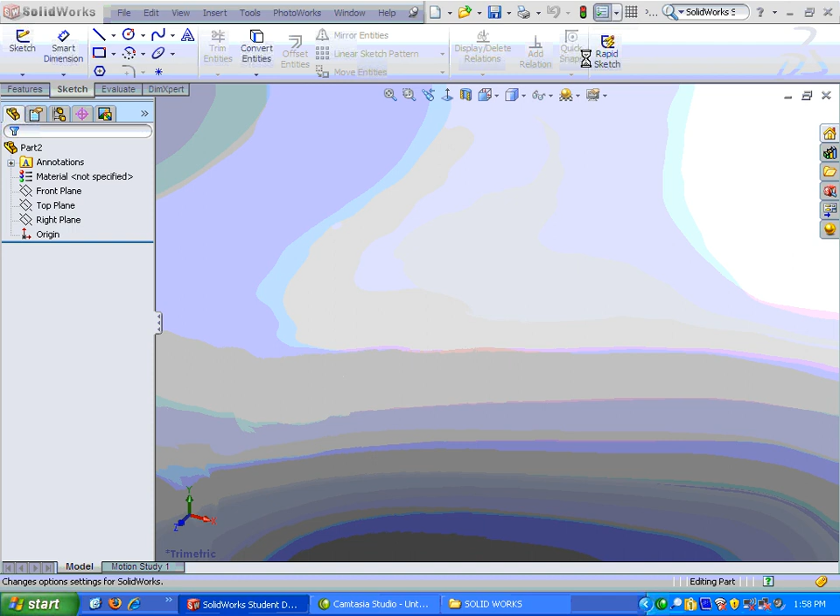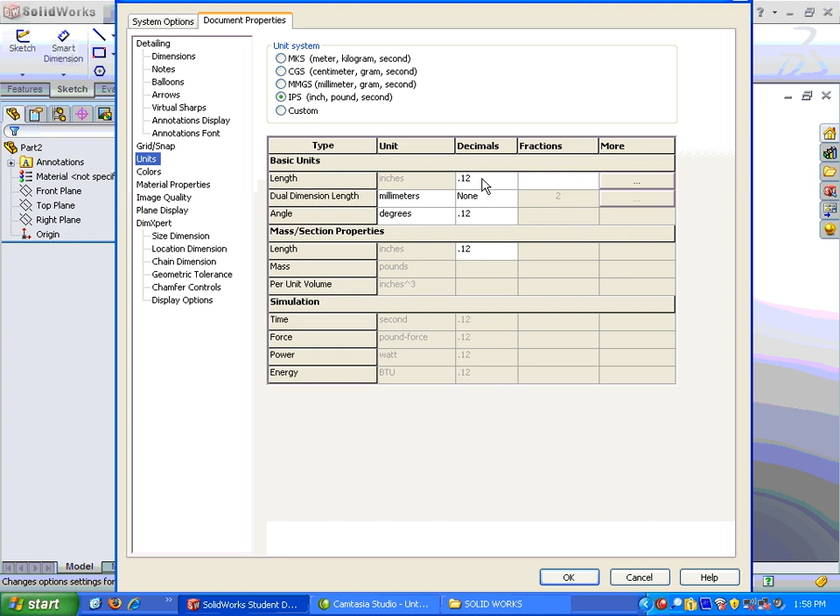Under document properties, I want to make sure my dimensioning standard is ANSI. I'm going to go down to snap and grid and display the grid on my sketches, so I'll click that button in. I'm also going to go to units and make sure it's in inch pound second, and change my decimal precision from 2 to 3, then click OK.

Now we're ready to start. I'm going to go over to my design tree where I have my different planes, and we're going to start on the right plane. As soon as I click that, I get a dialog box with my sketch button, so I'll click sketch, and that turns my right plane so it is normal to me. My sketch is there, so I know it's active.

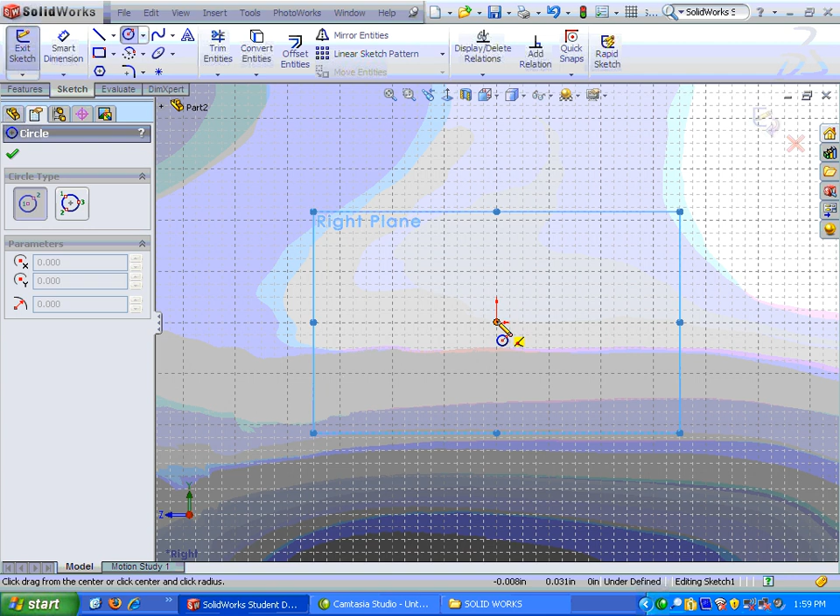I could start sketching from my tools up here, but if I right click, my tools are also available there. I'm going to start with a circle, put it on the origin point, click, and it doesn't really matter how big it is, so I'll just click it into place.

What I'm going to do now is dimension that circle. I'll right click again and choose the Smart Dimension button, then click on the circle.

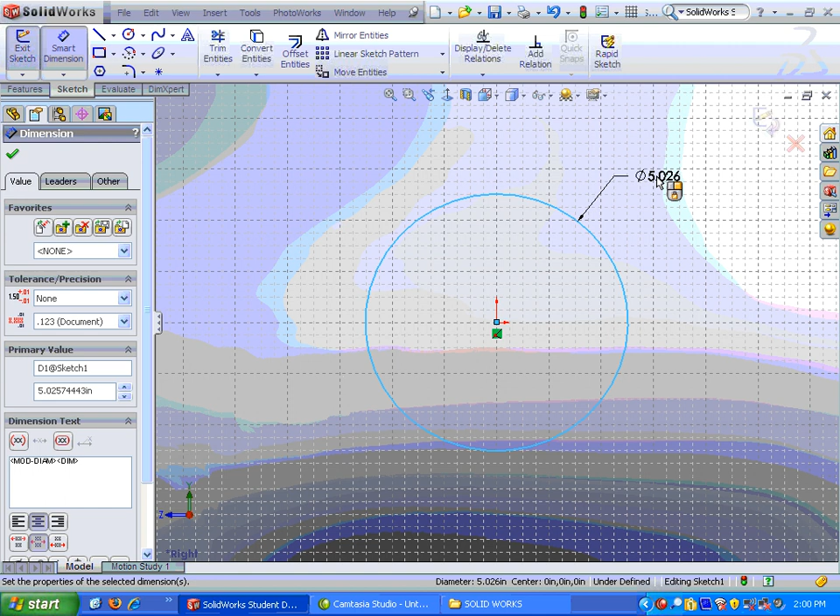Click it out and click it again, and now we can put in our diameter, which is 1.375, and click the check mark.

Once I have my circle there and dimensioned, I'm going to go to the Features tab on the Command Manager and choose Extruded Boss Base. On the left-hand side is the dimension for that, and it is 0.25. Enter.

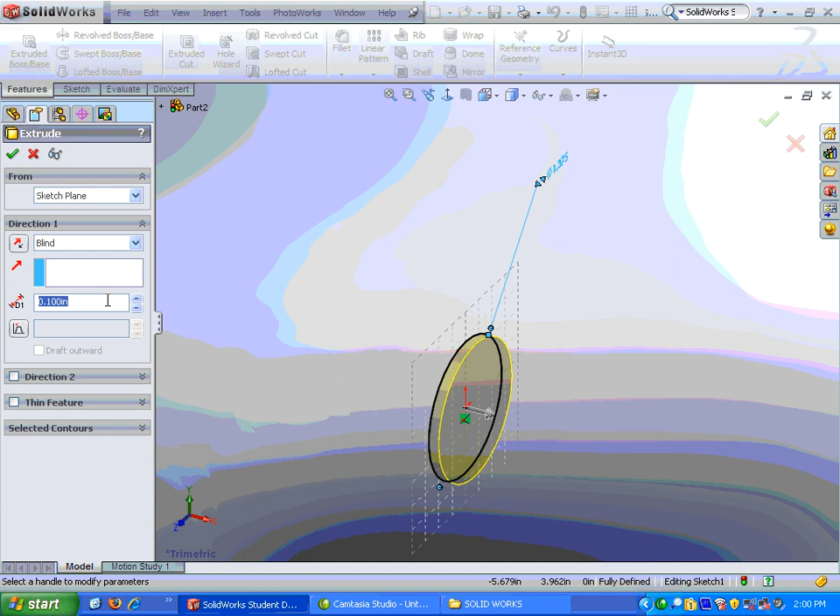I'm going to hit the check mark, and that will set that in there, and now I have my solid part starting to show up.

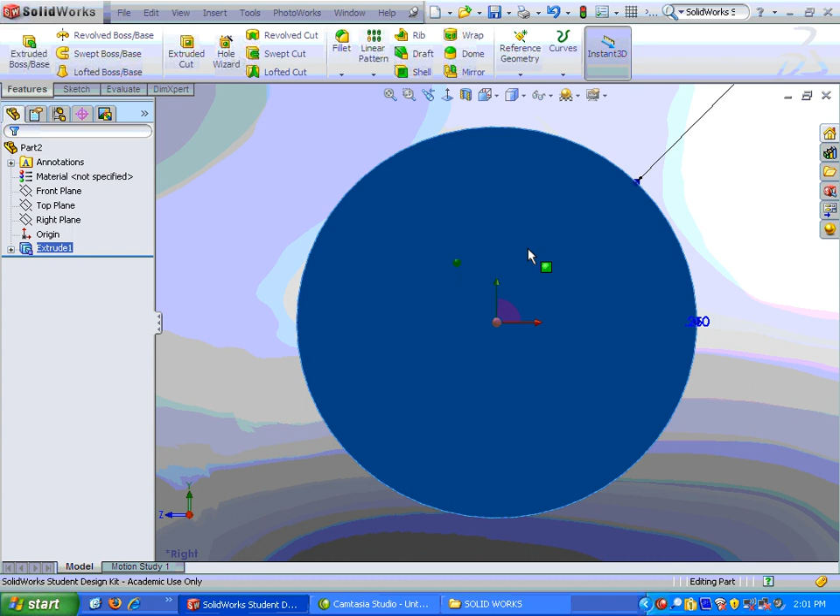Alright, let's get the next section ready to go. I'm going to click on this surface, turn that surface normal to, right click, and put a sketch on there again.

Notice my grid comes up, so I'm ready to sketch. I can right click again, go to circle, and I'm going to tie it to the origin again.

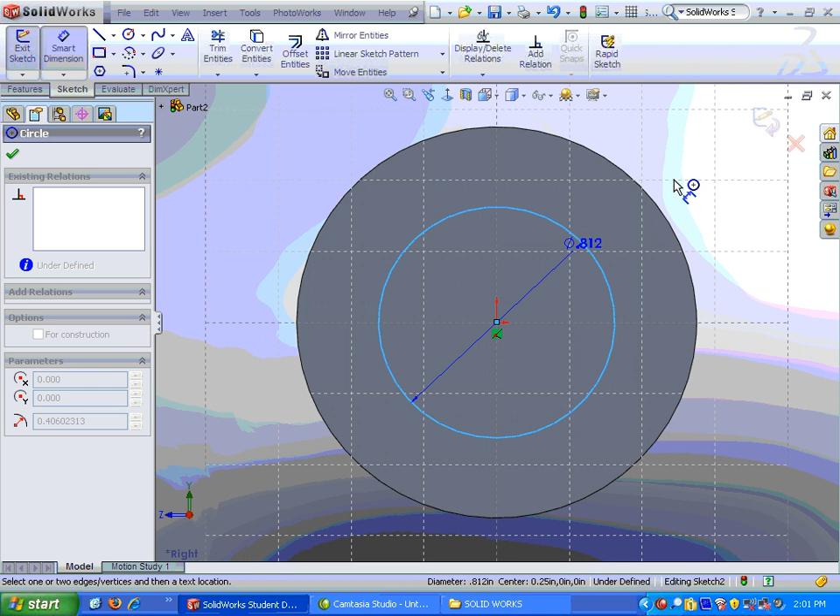Once I have put the circle in, I'm going to right click, choose Smart Dimension, highlight the circle, click it in place, and I believe this circle is 1 inch diameter.

And we will go to the Features tab on the Command Manager, and we're going to extrude again. This time it's not rotating it, so I'm going to push the middle button down and rotate so I can see it.

Now my dimension, I believe, is 0.5, and I'm going to click the check mark.

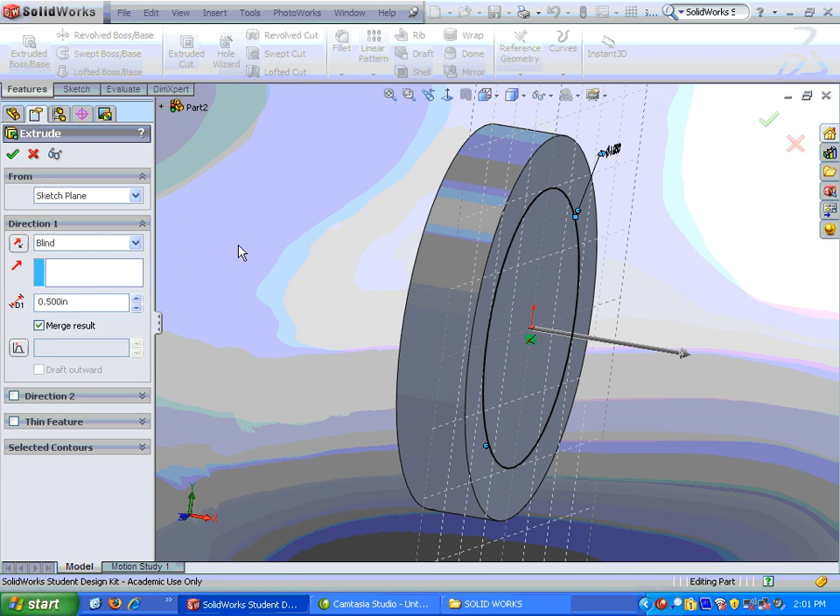Alright, the last thing we have to do is punch the hole in this. So I'm going to click on this surface and see if right click gives me normal to. Nope, I can't get normal to there.

I'm going to hit normal to, right click, sketch, right click, circle, draw the circle in, right click, dimension.

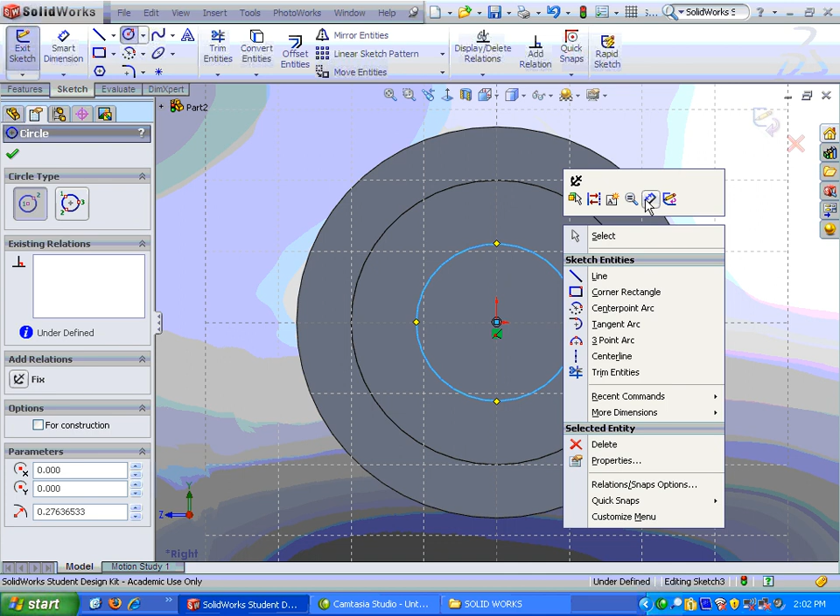The hole on this circle is 0.75. Hit the check mark.

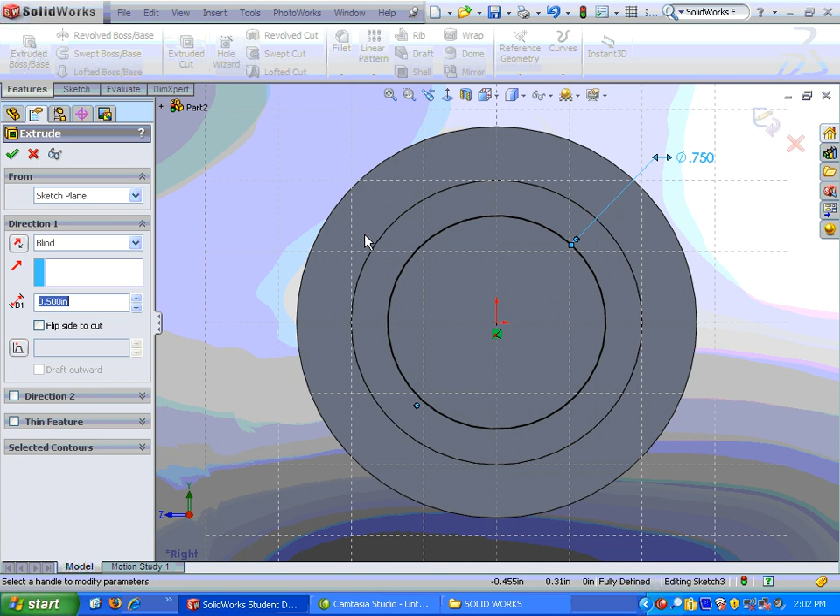Now we're going to go up to the Features tool palette, and instead of extruding, we're going to cut. So it highlights that circle, and we want it to cut over here on the left.

We have several options. Let's go ahead and go through all with this one. Hit the check mark.

And my first part, the bushing, is now completed.